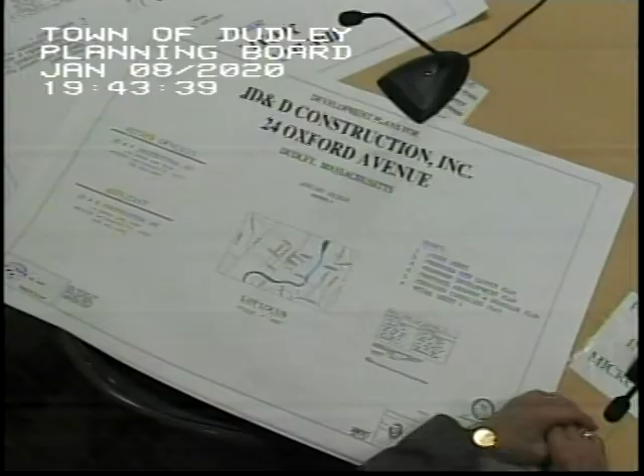Good evening, I'm Leonard Jalbert from Jalbert Engineering in Sturbridge. We're here to present a plan for 24 Oxford Avenue. Just prior to this meeting, we went to the Water and Sewer Commissioners, who approved the water and sewer connections for the site itself. We didn't know where they wanted the water and sewer connections to actually take place. They decided tonight that they would have them off the side near School Court and Oxford Ave. We wouldn't be crossing the street on Oxford Ave, so it's not depicted on the plans here as far as the actual location. That would be determined after tonight's meeting.

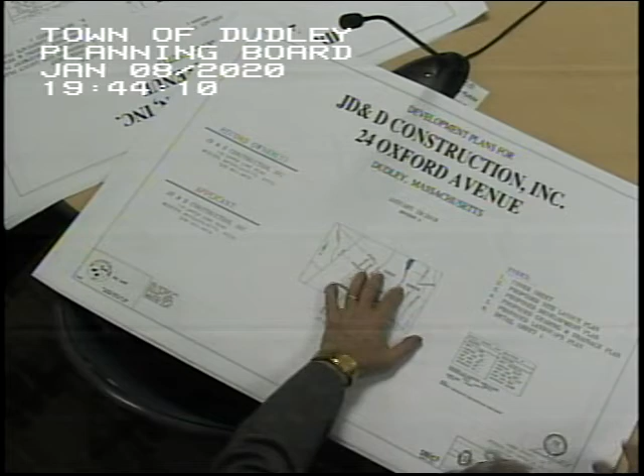So you have to open the street up eventually to make those connections? No, no, no. If we cross the street we'd have to, but right now it's on the inside, we don't have to open the street. Excellent.

Okay, where we're at - understand clearly that the water and sewer, you're not going into the street at all? That is correct.

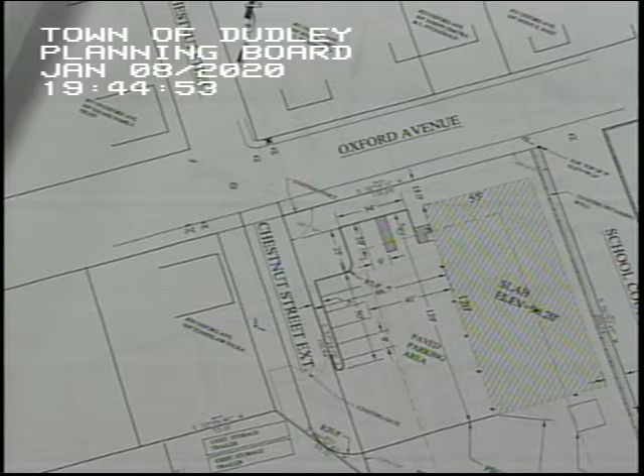What we're doing here is constructing a single-story building with an office on the northerly end. The building will actually be 55 feet by 120, which is 6,600 square feet. The building itself, because of the area and the nature of it, will be serviced by a fire suppression system on the site and connected to the public water.

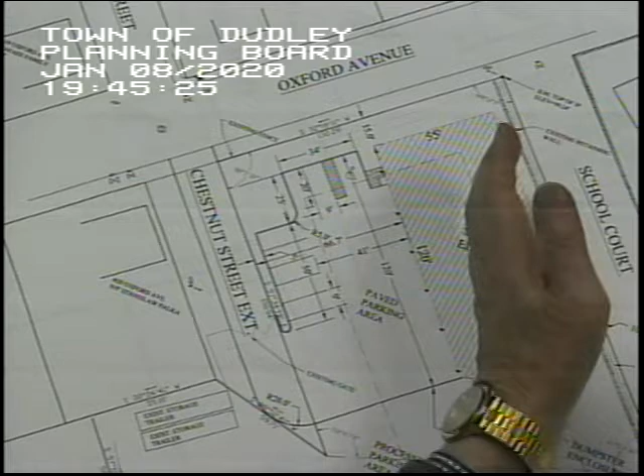The discharge of the building itself, because of the services inside, will actually be drained from the building going into the sewer separator, which is outside the building adjacent to Chestnut Street. That there will be going into a sewer separator, then to the infiltrators, then to the storage area inside, which is all depicted in the stormwater management report for the site itself.

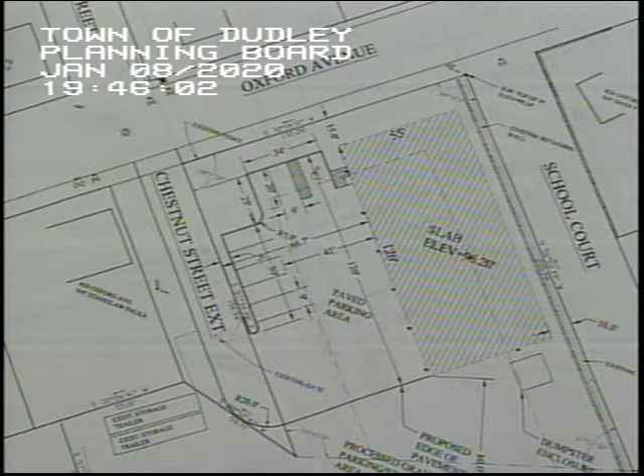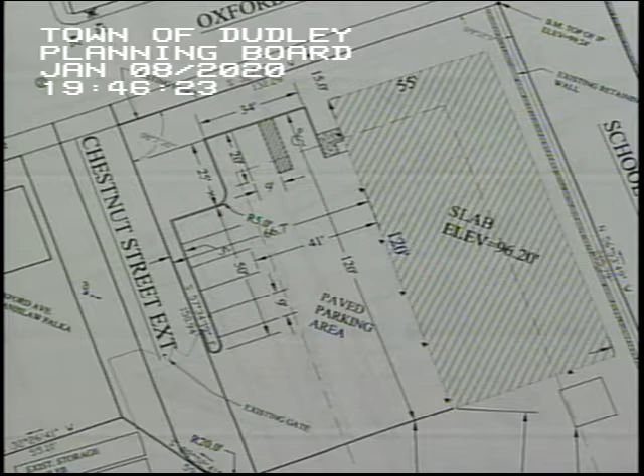The actual site is going to be used basically for construction purposes, for storage of their construction equipment and materials within the building. They do not anticipate any real traffic per se, in that the office itself is only located on one end of the building, which is adjacent to Oxford Avenue, and the lighting on the site itself is strictly off of the building itself, facing Chestnut Street.

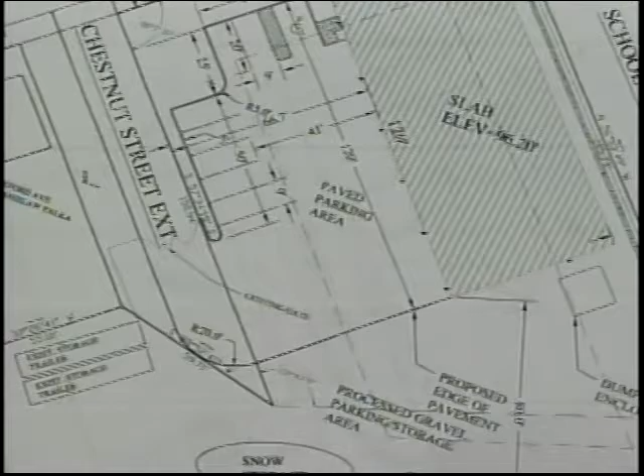We anticipate maybe there would be 2 to 5 cars per day on the site maximum. The spaces that we allowed on the site was, let's see, 1, 2, 3, 4, 5, 6, 7 regular spaces, and then eight regular, and then 1 handicap space for the site itself.

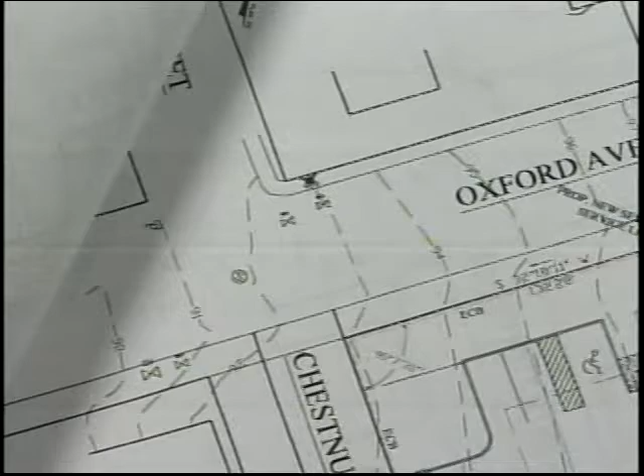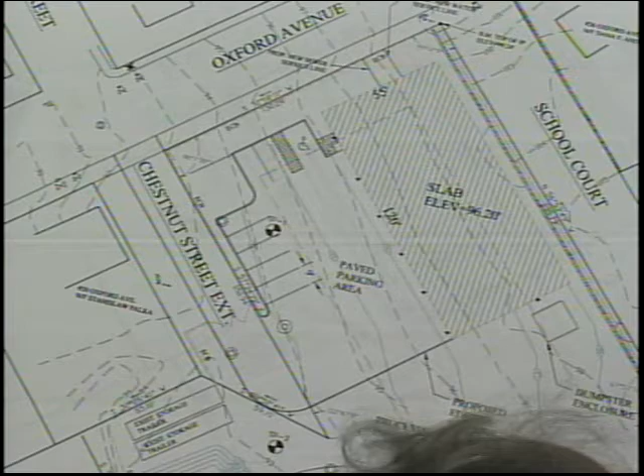The grading of the site - I don't know if any of you've gone to the site, but it has been graded in its entirety from School Court to Chestnut Street already because of the demolishing of all the buildings that were there. So if you go and see what's there, it's actually been stripped of the building and everything that was there.

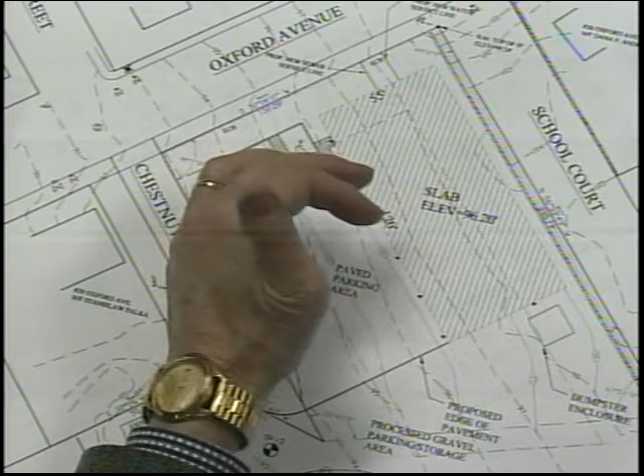So what you see right now is basically the existing grade for finish for the building itself. The building, garage, and everything where the storage will be is at elevation 96, which is basically the grade within the site already. So from what's being done now to what will be done later, there's actually going to be no grade changes to speak of. What you see is what you're getting.

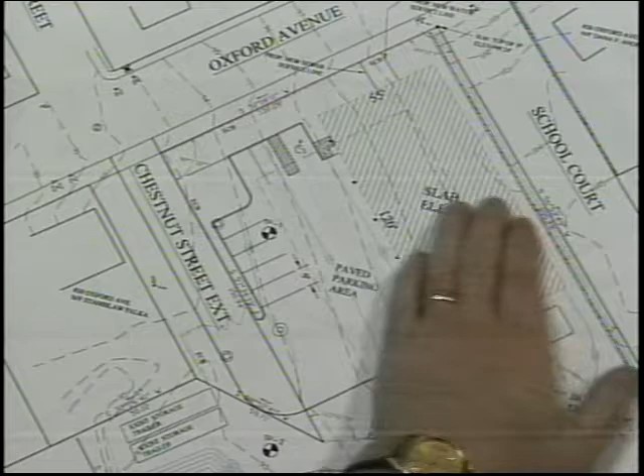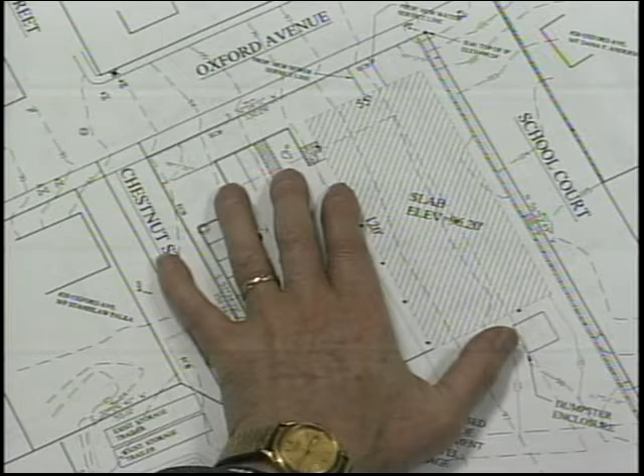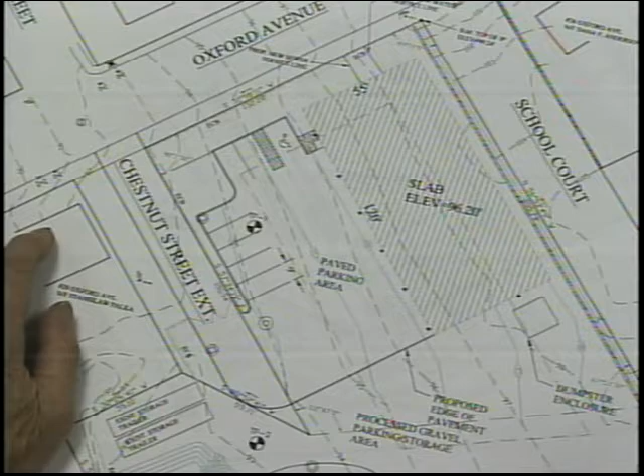The drainage itself goes in a sheet flow basis to the 2 catch basins, and then the oil separator, from the oil separator into the recharging system, and then from that there's an overflow on the southwesterly corner of the property, which would activate in the event of an extra storm, where the runoff would go into that area. We didn't put any provisions for runoff from the overflow detention area - the chances are, if anything happened, it would just flow back into the lot, but that's highly unlikely. We did the calculations for the 2, 10, and 100-year storms, and it's not going to happen. It's very small.

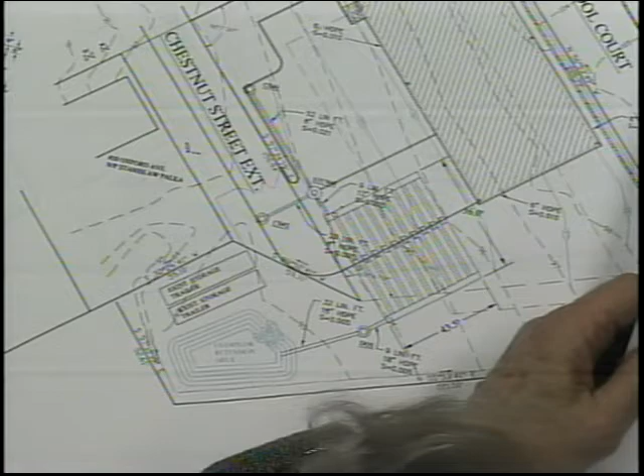The other thing we did on Chestnut Street, for any runoff just to catch anything that went from the detention basin or retention basin over, we put a catch basin in on Chestnut Street. That catch basin would run into the Stormceptor and then back into the chambers here, so it'd be all contained within the property itself.

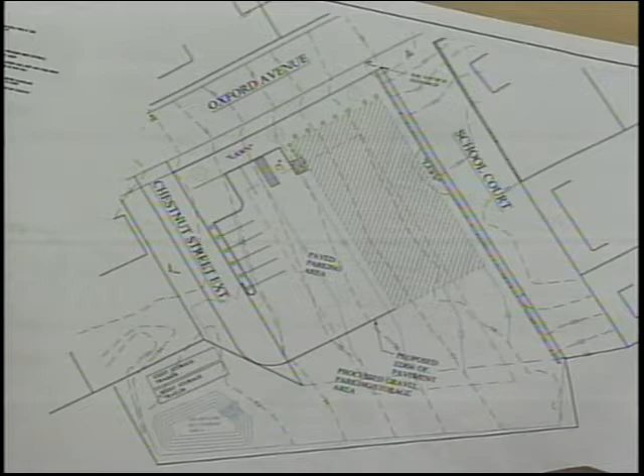The vegetation basically on the property would conform to the town - we've got trees and everything lined up along Chestnut Street, and vegetation along Oxford Avenue in that area. The rest of it, in the paved area, would be basically from the limit of the building to Chestnut Street, and the rest of it would just be plain gravel.

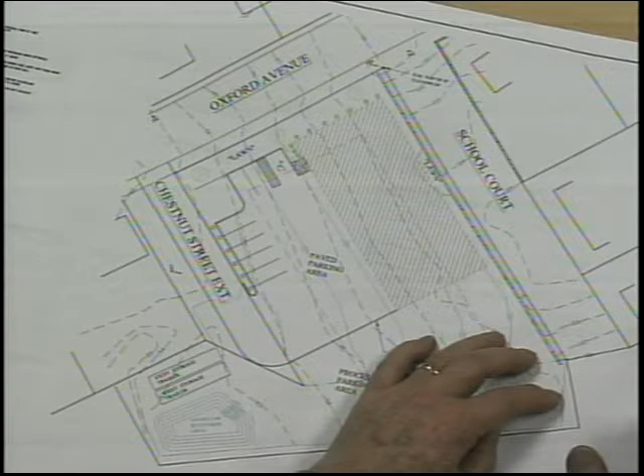Okay? Basically, that's it. We received a letter from Graves Engineering today or this afternoon relative to some of their concerns on the property itself. What we're really doing is - they're talking about the need for the driveways and everything. What it is, I have photos showing the driveways in the area of the property.

Here we are right here. This is Chestnut Street extension right here. This is Oxford Ave, and this is School Court. There's one driveway over here on this side of the house, one over here, one right here, and basically one over here, and right there. This is where the traffic would be coming off of this area here.

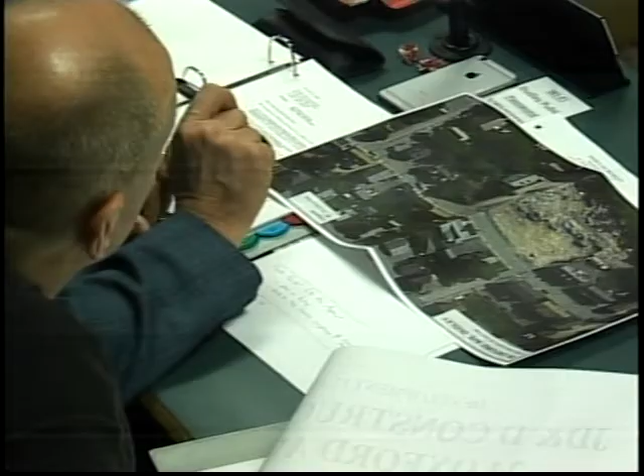Dan, can I get a better look at that? You sure can. Yeah, makes it too easy.

The frontage actually goes from School Court here right to Chestnut here. This is the project that we're talking about. There's the driveways, which are basically here, here, there. That's it. So this here's Chestnut Street on that side.

So before I start getting to our questions, I was going to ask if anybody in the audience -- all right, thank you for that presentation. Is there anybody in the audience who wants to speak relevant to this project?

Going once? No audience comments? You don't have any comments from the audience? Do you have a couple written? Well, no, I didn't get any. Didn't get anything, comments written.

So is it okay if we close the public hearing? No, we have to go through -- right, okay, we should discuss the Graves Engineering report.

If you want, I can go through their comments. I know that the planning board has some questions lined up. Okay, it seems also that, just from my review earlier today, that there are a number of waivers that you're being asked for. Are the waivers being asked for the site at all?